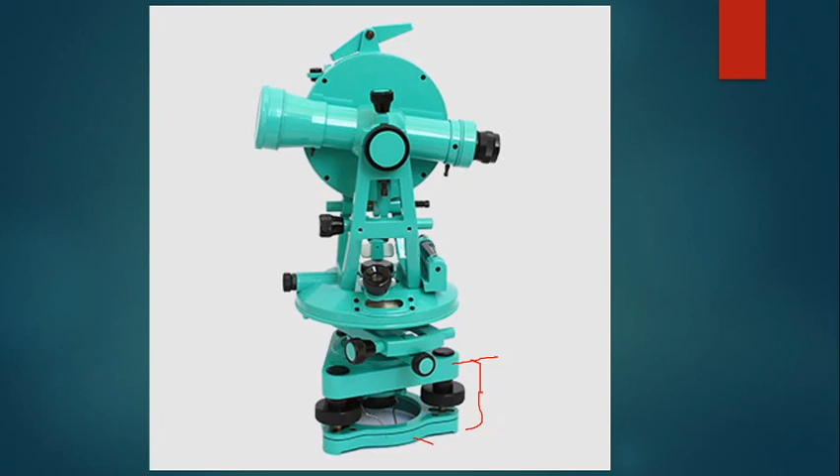In the previous class, we discussed the photographic view of theodolite from its side view as well as a front view. This hook-like arrangement will be there at the bottom of the spindle, inner axis, and you can see the front view, something like this.

And at the base of the theodolite, there is an option where you can move it slightly. I'll show you this in this particular diagram.

In this diagram we can see there are some screw-like arrangements. With the help of this, you can slightly move your theodolite within a certain radius, so that exact bisection of center may be obtained after leveling with the help of this shifting center. This is actually called the shifting center arrangement.

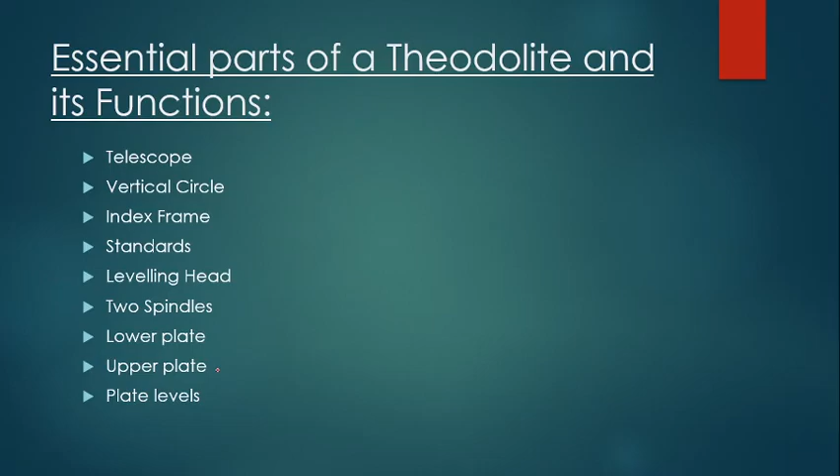And lower plate, upper plate. In the lower plate we have the scale, and in the upper plate the verniers, and plate levels either 2 or 1, along with the altitude level, and tripod, plumb bob, compass. These last two parts are optional and may not be required every time. If present, obviously useful; if not, you can still do the survey.

Now today we'll continue with some basic definitions of terms used in theodolite survey. What is a vertical axis? This I think is also covered in the last class.

In the last class we were saying, in this particular diagram, the center line which is passing through the solid internal cone is nothing but a vertical axis. This is common for both inner spindle as well as outer spindle, and it is an imaginary line about which both the spindles are rotating. That is nothing but a vertical axis.

The vertical axis is an axis about which the instrument can be rotated in a horizontal plane, and this is the axis about which both lower and upper plates rotate.

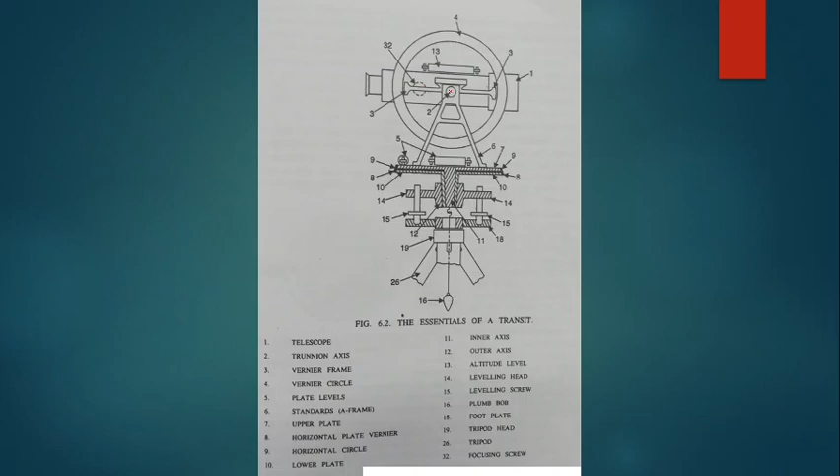The next one is horizontal axis, also called Trunnion axis. I'll show you, it's a line something like this which passes through the center of the telescope. Here, a point going perpendicular to the screen from this dot, this dotted line, is nothing but the Trunnion axis. The dotted line from my left to right is the Trunnion axis.

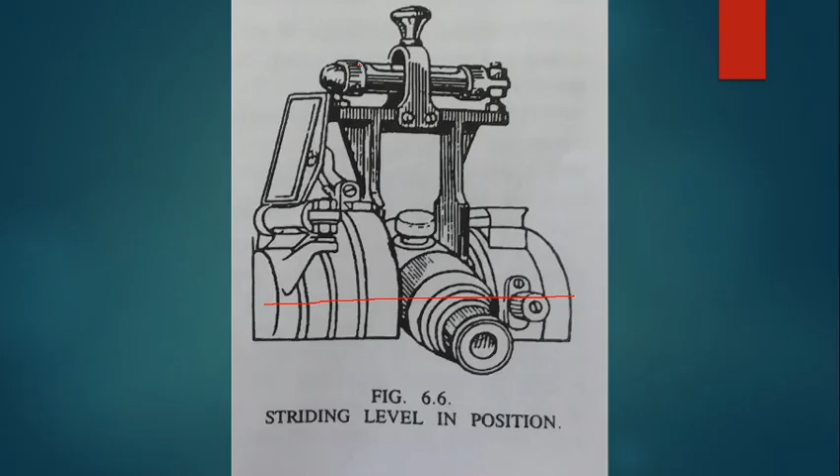It is also called the horizontal axis, and it is an axis about which the telescope and complete vertical circle can be rotated in the vertical plane. So about this particular line only, the revolution or rotation takes place.

Then we have the next axis, the line of sight, also called the line of collimation. This is also something we come across in leveling, dumpy leveling, and leveling surveying. It is an imaginary line passing through the intersection of crosshairs, both horizontal and vertical, with the optical center of the objective glass, and its continuation. This is nothing but the line of sight or line of collimation.

Next we have the axis of the level tube, whether it's a horizontal or altitude level tube. The axis of a level tube or bubble tube, commonly known as such, is a straight line tangential to the longitudinal curve of a level tube at its center.

The axis of the level tube is horizontal when the bubble is exactly centered. If you see this bubble tube, the top is curved in nature, something like this, and if you draw a tangent to this shape exactly at the center, this is an imaginary line which is the axis of the bubble tube.

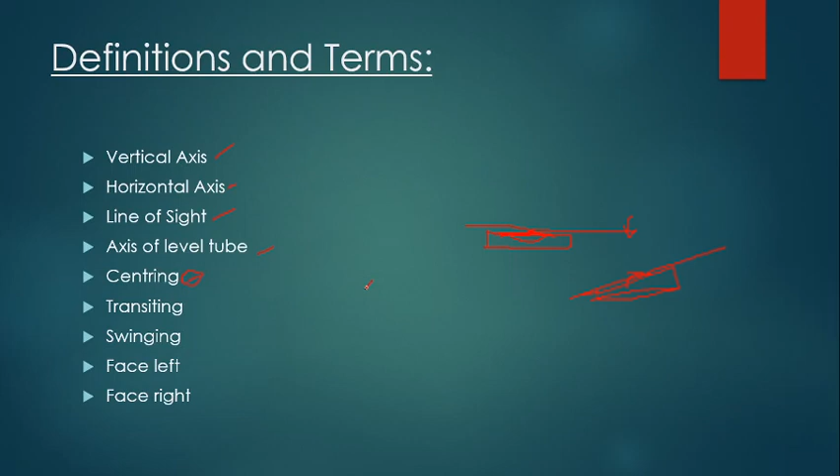Next we have a term called centering. Centering is the process of setting the theodolite exactly over a station mark. How it can be achieved, we will discuss in detail in a topic called temporary adjustments of a theodolite. For now, centering means bringing the instrument over a ground station marked with an X.

There are three legs of the tripod over which the actual theodolite instrument is mounted. If a plumb bob is suspended, it must exactly come on this particular mark. If it is not, then we can move the legs.

We have different ways to do this. At the initial position, the plumb bob may not be exactly on the mark, it may be slightly off to one side. So we need to move the three legs by the same amount and in the same direction as the plumb bob rests on the ground.

That can be one method, or you can also do a radial and circumferential movement of the legs, meaning moving these three legs circularly, towards the center and away from the center. By doing this also, you can set the instrument and perform the centering.

But remember, after performing centering, the tripod head should be approximately parallel to the ground. It should not be abnormally inclined to the surface. If it is, then on the leveling head, with the help of 3 or 4 foot screws, you can only achieve a certain amount of leveling accuracy.

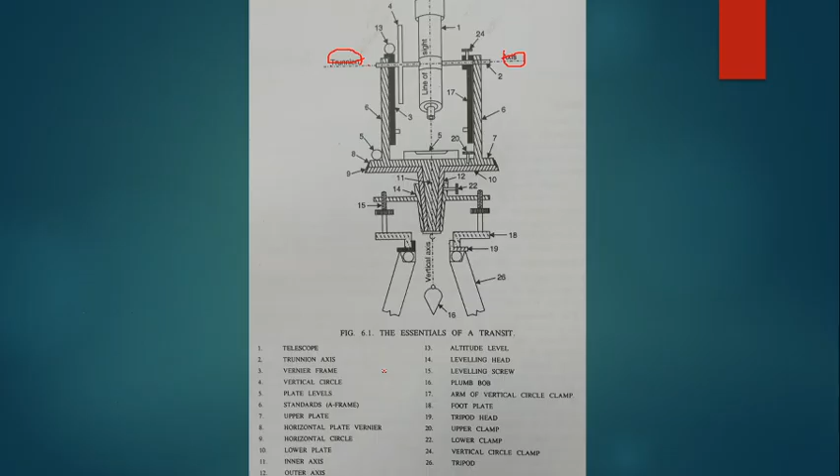Yes, one minute. This kind of arrangement is called shifting center. When you operate or loosen this screw, the center may be slightly shifted from its initial position. That is called shifting center.

Some instruments are provided with a shifting head with the help of which accurate centering can be done easily. So how is centering done? By moving a leg radially, the plumb bob is shifted in the direction of the leg, while moving a leg circumferentially or sideways, the change in inclination is affected without disturbing the plumb bob.

So these are the primary things. When you move radially, the plumb bob is shifted in that direction, but when you move circumferentially or sideways, the inclination is affected without disturbing the plumb bob. These are the points to be noted while performing the setting up.

The second movement is therefore effective in the approximate leveling of the instrument. As I said, moving radially will disturb the plumb bob directly, and therefore the second, circumferential movement, is always preferable. Approximate leveling is done either with reference to a small circular bubble tube provided on the tripod, or just by rough eye judgment.

So you are going to perform centering. After that, if a circular bubble tube is provided on the tripod, you can check that the bubble tube is centered, or otherwise you can bend down a little and check the horizontality at the top of the tripod head with the naked eye only.

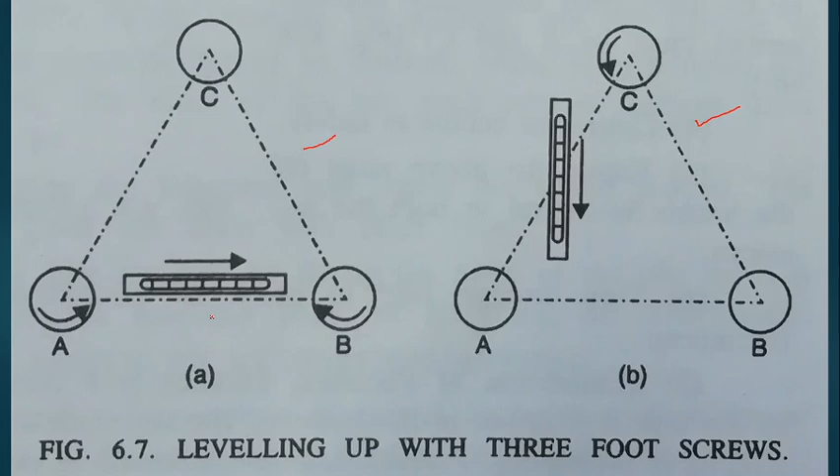We need to simply rotate the third foot screw to center the bubble tube, and this process is repeated till both bubbles are centered. If the instrument is now rotated about the vertical axis through one complete revolution, each bubble now remains in the center of its run if they are in adjustment. If not, a slight deviation may be there, but we cannot do anything about that.

Now, for a four-screw head: if the head consists of four screws, turn the upper plate until the longitudinal axis of the bubble tube is roughly parallel to the line joining any two diagonals. Let's say these are the diagonals D and B. You have to rotate your telescope such that this bubble tube is parallel to this diagonal D and B.

Then you need to operate the two foot screws in the previous manner to bring back the bubble tube to the center, in exactly the same way as described earlier.

Now turn the upper plate through 90 degrees until the spirit level axis is parallel to the other two diagonally opposite screws, like A and C. So you have to keep it parallel to the other diagonal AC now, and center the bubble as before.

That means you have to rotate these foot screws either both inward or both outward, holding with thumb and index finger, to bring back this bubble to the center, and repeat the above steps till the bubble is centered in both of these positions.

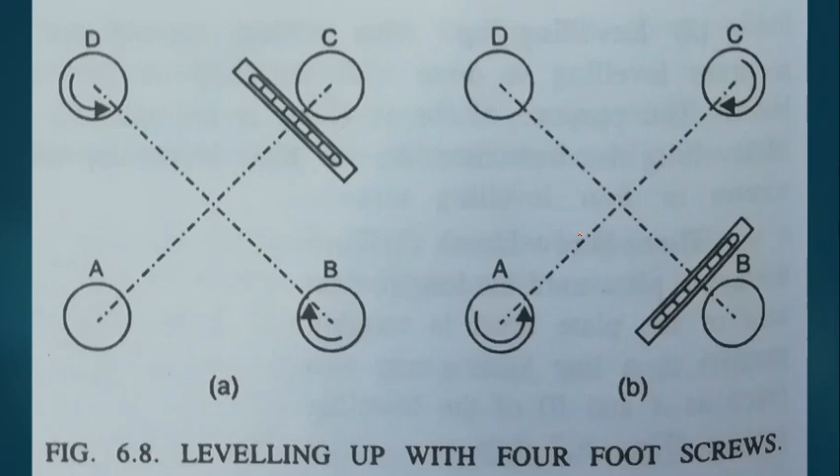Then you need to turn 180 degrees to check the permanent adjustment, as we have done in the three foot screws case also. So with this, leveling up is over.

Leveling completed. Next we have elimination of parallax, or focusing. What do you mean by parallax? Parallax is a condition arising when the image formed with the objective is not in the plane of the crosshairs.

What happens here? A white image without a clear picture against a white background will be displayed when parallax is happening. Unless parallax is eliminated, accurate sighting is impossible. Therefore, this parallax needs to be eliminated. Parallax can be eliminated in 2 steps: first, by focusing the eyepiece for distinct vision of crosshairs, and second, by focusing the object to bring the image of the object in the plane of the crosshairs.

So let us take the first one, focusing the eyepiece. To focus the eyepiece for distinct vision of crosshairs, point the telescope towards the sky or hold a sheet of white paper in front of the objective, and move your eyepiece in and out till the crosshairs are seen clear and distinct, at some particular graduation position to suit the eye. This may save much more time.

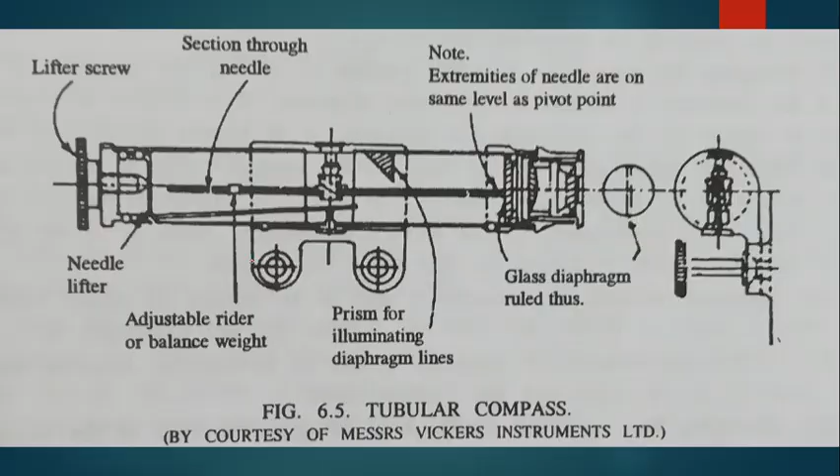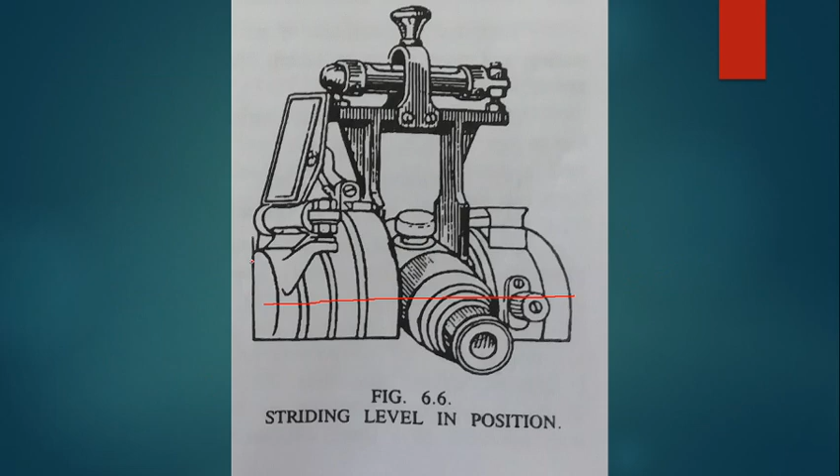We were discussing some definitions and terms: vertical axis, horizontal axis, line of sight, and axis of bubble tube. These are all also called fundamental lines of theodolite. Vertical axis, horizontal axis or Trunnion axis, line of collimation, axis of level tube, and one more, axis of telescope. Don't confuse these two terms, line of collimation and axis of telescope, these two are actually different.

Line of sight is nothing but an imaginary line joining the optical center of the objective glass and the intersection of crosshairs and its continuation, whereas axis of telescope is nothing but an imaginary line joining the optical center of the objective glass and optical center of the eyepiece and its continuation. That is the only difference.

Now, if the instrument is in perfect adjustment, both this line of collimation and axis of telescope will coincide and continue as a single line only. And if the instrument is not in perfect adjustment, these two will differ, and thereby a slight deviation in the lines may be there.

If you observe the relation between the vertical axis and horizontal axis, the name suggests these two are perpendicular. Horizontal axis is also known as Trunnion axis, which is actually perpendicular to the vertical axis, irrespective of its position, whether the telescope is horizontal, inclined, or even vertical. This horizontal axis is automatically perpendicular, because the telescope is mounted at right angles to the horizontal axis or Trunnion axis. Now, axis of level tube.

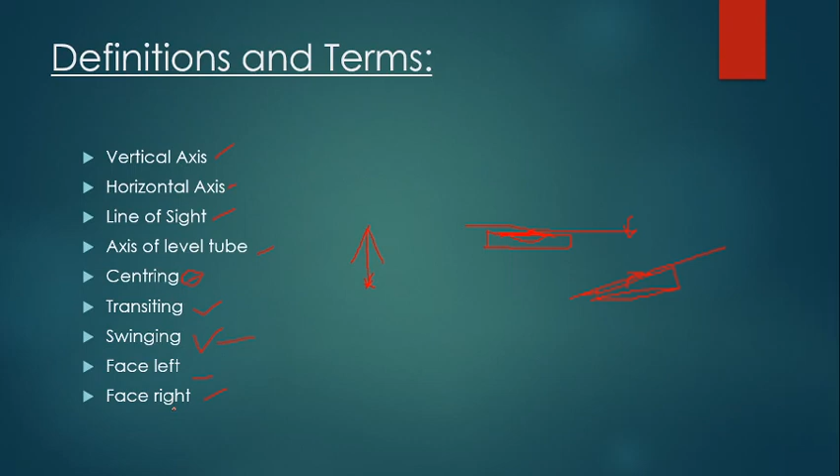Coming to face left and face right: if the vertical circle is on the left side of the observer, it is face left, and if the vertical circle is on the right side of the observer, it is face right. Telescope normal is actually face left only, and similarly face right corresponds to telescope inverted.

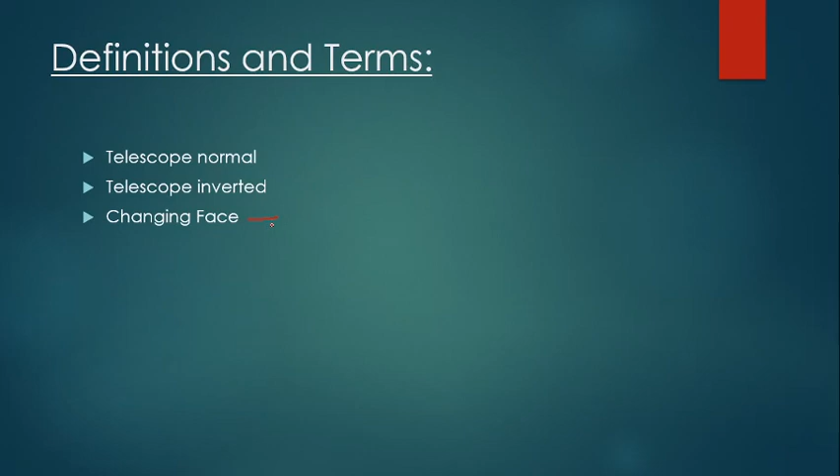Changing face, bringing telescope from face left to face right, includes an operation of transiting and then swinging by 180 degrees. Then automatically face changes. Then we have discussed about temporary adjustments.

Temporary adjustments are just like a dumpy level: setting up, leveling up, and elimination of parallax. In setting up, we bring the station exactly over the ground mark, and we roughly level the tripod. We achieve this by rotating the tripod legs radially and circumferentially, using either a suspended plumb bob or optical plummet.

Leveling up uses either a 3-screw head or 4-screw head. If using the 3-screw head, in the first step we keep the bubble tube parallel to any two of the foot screws, then rotate those two foot screws by holding them between thumb and index finger. Rotate both of them, either both inward or both outward, such that the bubble tube is exactly at the center.

Then you rotate by 90 degrees, and operate the third foot screw to bring the bubble again to the center. Then bring it back to its initial position, parallel to the other two foot screws again. This process is repeated such that the bubble is centered in the primary principal two positions.

After achieving this, you rotate again by 180 degrees and check the center of the bubble. If the instrument is in perfect adjustment, the bubble is exactly centered, otherwise it will change.